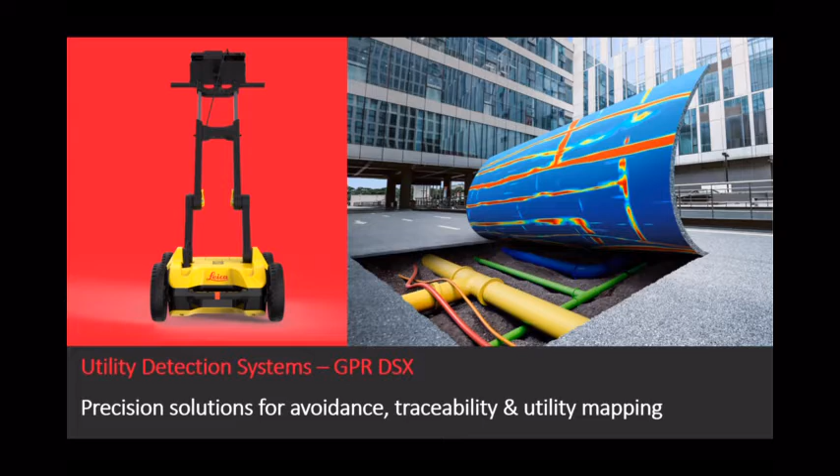So we're going to start off with the DSX, and this is a new take, should we say, on the visualization for ground penetrating radar. So it's still ground penetrating radar. We haven't broken any laws in physics. We've still got the same limitations that we've always had. And just remember that GPR isn't an all-seeing eye. It's just one of the tools in the toolbox that allows us to understand what is going on under the ground in that world we can't see.

So the reason for the tool even to be in existence is that anyone that's really used radar over the years is used to seeing a radargram, that gray mesh that's on the left-hand side of the screen. Now, this can be a challenge. If you're a utility professional, working with that is no issue. You can glean a lot of information from it. But this piece of technology is geared around damage prevention. We're not trying to sell this to a utility professional. We're just trying to mitigate as many utility strikes as we can. How do we make the technology simpler so people can understand what's happening under the ground?

So we looked at it and we see the radargram as a challenge. It's a barrier for people to feel comfortable and interact with and get the best information possible. So what we did with the DSX is we changed the workflow. We changed the approach of how we find utilities, and looked at it from a best practices point, where we should cover an area in a multitude of directions with a multitude of tools. And instead of the radargram, we gave a tomographical image, which is what we can see on the right. It almost looks like a thermal imaging view of the ground. And we're just looking for anything long and linear, and we're going to use algorithms to help determine where these cables and pipes are.

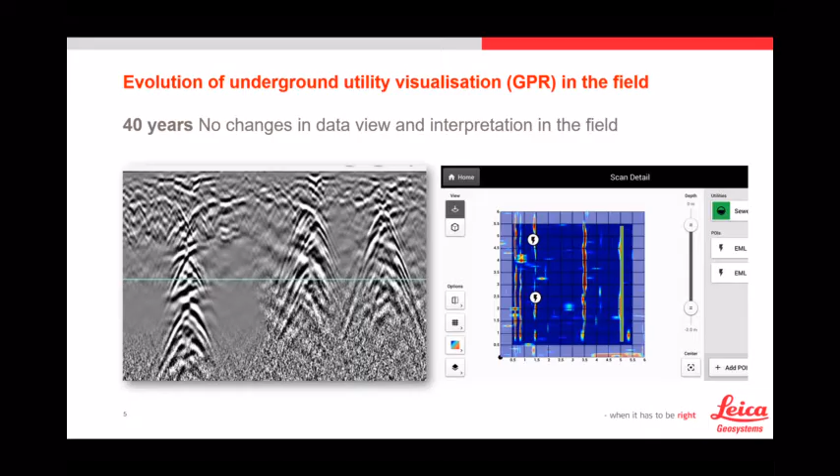So, as I said, it's ground penetrating radar. We haven't changed anything here. The antenna, to be technical, is a 600 megahertz antenna. You're going to get around 6.5 feet of penetration. About 2 meters is where it maxes out on its algorithms and processing this information. As you would expect, it does link with positioning sensors, total stations, or GNSS. It doesn't matter if it's a Leica or a competitive unit, we communicate with all. But really the thing that we did different is with the DXplore field software. And really the important part there is the word field.

We don't need to process any data back in an office. Everything we see is delivered within minutes within the field. So we acquire the information, we produce the visualization, it assists in the interpretation, and then we can document everything in the field. And when I say document, that can be a DXF, DWG, Esri shapefiles, PDF reports, everything's done directly in the field, and we can work on this information almost immediately.

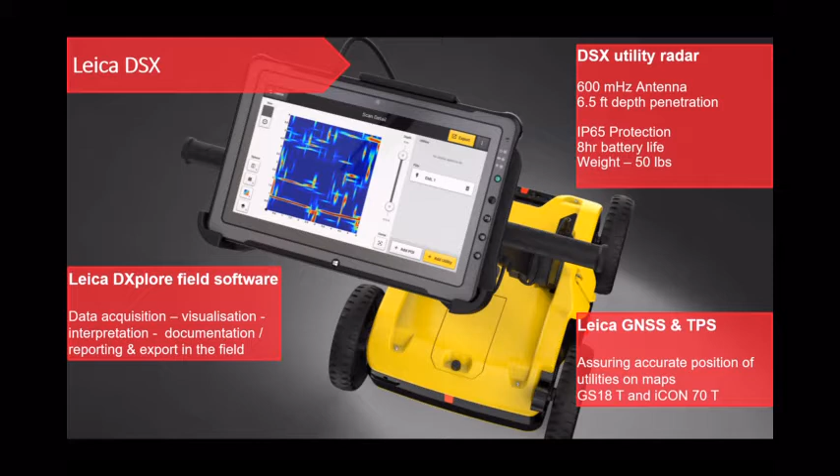So to get this, what did we do? So like all ground penetrating radar, we need to cover an area in 2 directions. We call it the grid scan. So we need to cover an area, and the biggest grid scan we can do at any one time with the limitations on the speed for the processing is 33 feet by 33 feet. Okay, so 10 meters by 10 meters. We collect over the area in 2 directions, and we're going to have a scanning interval of 18 inches or half a meter, and we're going to cover the area.

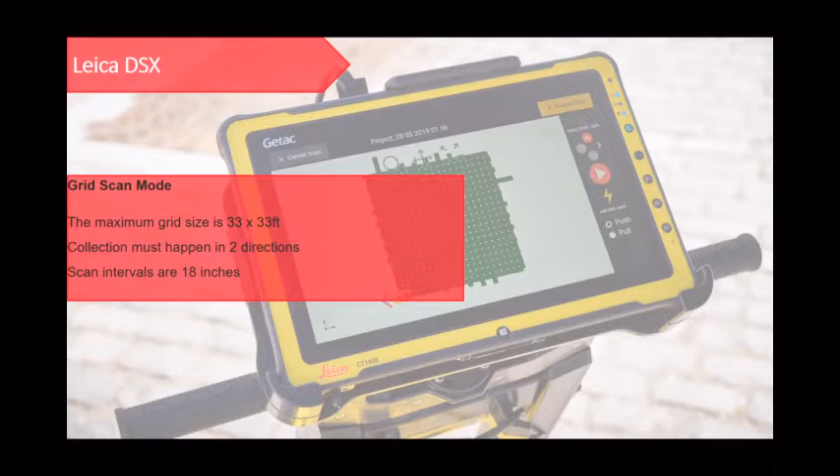So the only thing that we see at the start of any project is making sure we get the best data into the system as possible. The better the data we have in, the better the information and the data we get out. So we collect the data. We can then analyze that data. So we collect everything, we hit a button that says analyze, and within about 30 seconds, we get this processed model of information that looks like a thermal imaging view of the ground, should we say, the tomographical image.

We have a depth slider on the right-hand side, so we can go through in 5, 10 centimeter chunks and look for anything that's long and linear, typically what utilities are. So as we go through these different depth layers, we can start to see these linear objects, and this is where we can utilize the algorithms that are within the system. So when we can see something, we hit a button that says add utility, we slide our finger down what we believe to be a pipe, that anomaly, and the system is going to make the determinations for us.

So it utilizes algorithms to go and look at the radargrams, effectively, that bit we don't see. And can it see a hyperbola? Can it see these indications of utility? If it can, it agrees, marks it, and then utilizing a semi-automatic pipe tracking algorithm, it'll draw the utility line in for us within a matter of seconds. So as you can see, we have the first line marked.

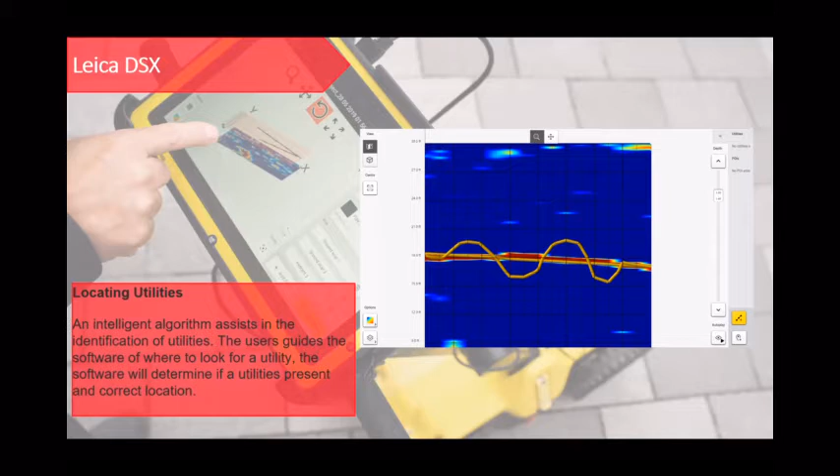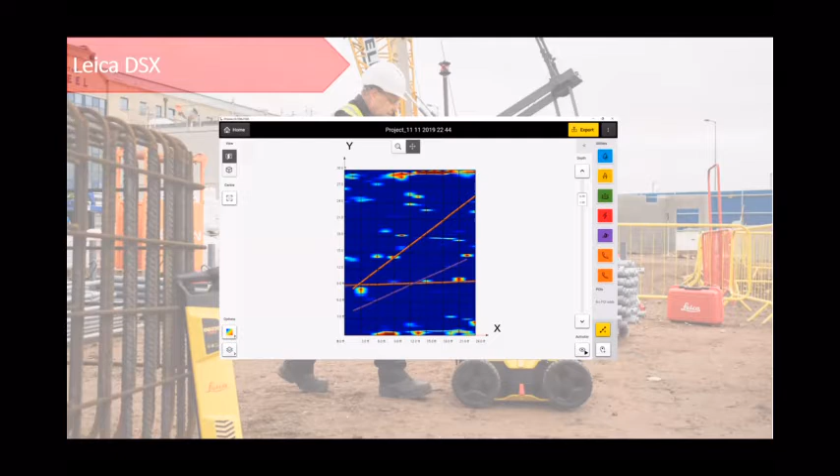Now, like I said, it can guide us. We don't have to be brilliantly accurate, and it puts it in the exact location it was detected. So for example, I drew the line as a wave, but the software has the ability to put it in the correct location for where those utilities are located. So as an example, we're going to work through this block of data. We're going to go all the way through it, identify the utilities that we can see in that area, and then we're all good.

So the next step would be to turn that data view off. We no longer need it. We've identified where the utilities are. The next step is to understand where these are. Do we need to mark the ground or whatever? So we can turn that layer off, and then we have the utility pipes. So we can understand where things are going, how they're running, so on and so forth. So if we were utilizing a positioning sensor, we hit lead to utility, and we're able to mark out all those utilities. We get the XY direction, and it tells us how far to walk, where to mark, and so on. So it's extremely easy.

If we hadn't used a positioning device, so we didn't have a total station with a GPS antenna connected, then we can use an arbitrary grid, just lay that on the floor, and we can just pull tapes to measure where those utilities are located in that work area. But not only can we see them in a 2D view, we know with radar that we can get depth estimation. It is an estimation. We don't know exactly how accurate it is, due to a number of factors, but we can get that additional information of how deep utilities are.

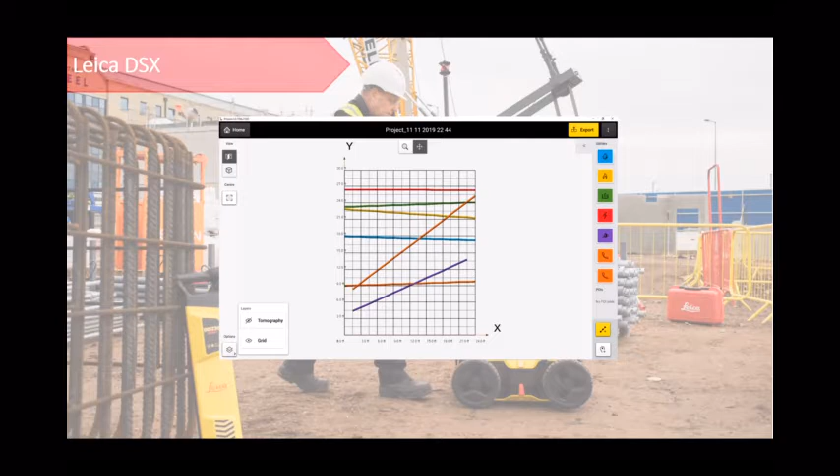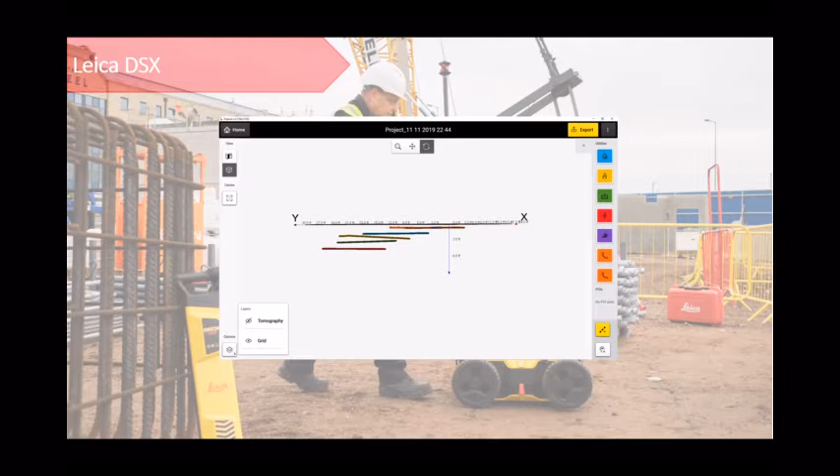So I can hit a button that allows me to rotate this as a model. So I can rotate that model of data and understand how deep those utilities are, how they interact with each other. That can change a dig plan, a dig process. But we have that little bit more of information, and it also looks more visual and easy to understand when we're directly in the field looking at the ground that we just scanned. Now, for documentation wise, during the collection or at any point, we can add other bits of information referred to as a point of interest. So like I said at the beginning, GPR is GPR.

It's not going to allow us to find everything, and you're probably going to use a locator before you use a GPR. So if you find something with a locator that you don't find with a GPR, we can put the marks in and say, yep, we found something here, and we can code it as an electromagnetic locator location point. Or we might have called a water line, and we know that because it's connected to a fire hydrant, or we can see a valve in the ground, or many other different things.

So we can start building some extra layers into this picture. But anything that we see here during our export does go out. So anything you put in here, size-wise, drawn-wise, will be exported during the DXF process, or as a PDF. Every piece of information is captured. So within a matter of minutes, and I do mean minutes, we're able to get a complete understanding of what's in that little area under the ground, where the utility is going, what are the dangers, how deep are they, so on and so forth.

But like I said, it's there for that prevention. Someone's going to be digging and they want to do a redundancy check on that area just to make sure that all utilities have been marked correctly, they are accurate. It's just that thing to give a little bit of self-confidence.

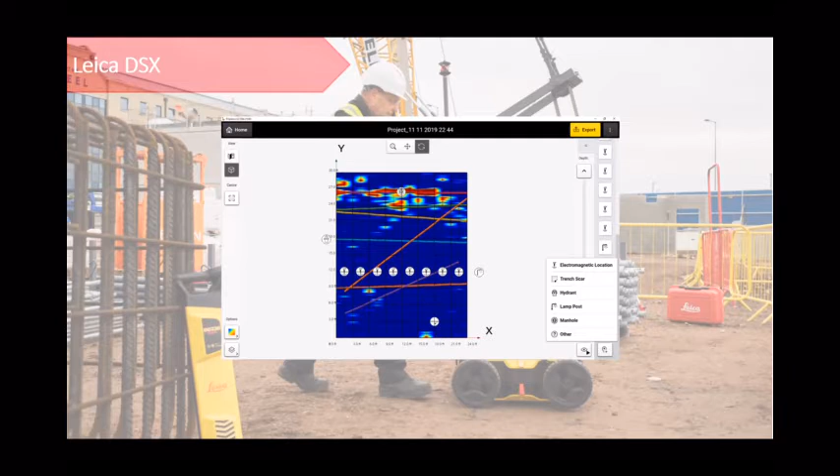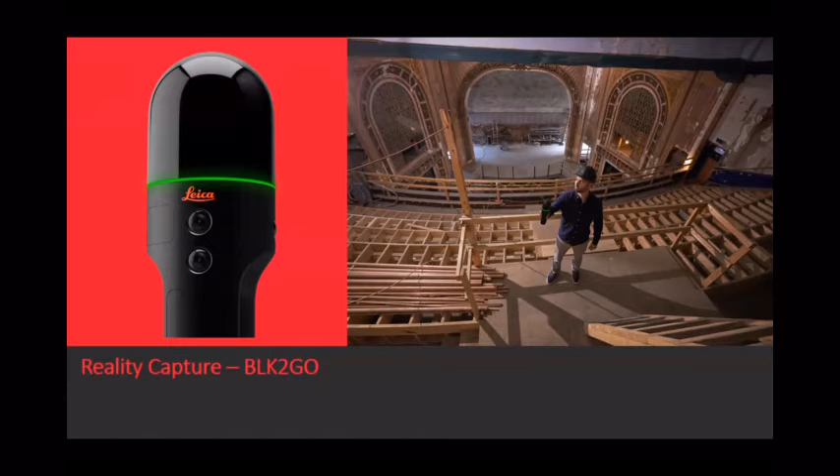So if we move on to a different technology, and again, it's not its normal home, should we say, we have a product called the BLK2GO. And as you can see from the image on the screen, it was pretty much invented for architects to capture information from inside buildings so they can design refits. But that's not its limitation. We can do other things with this technology.

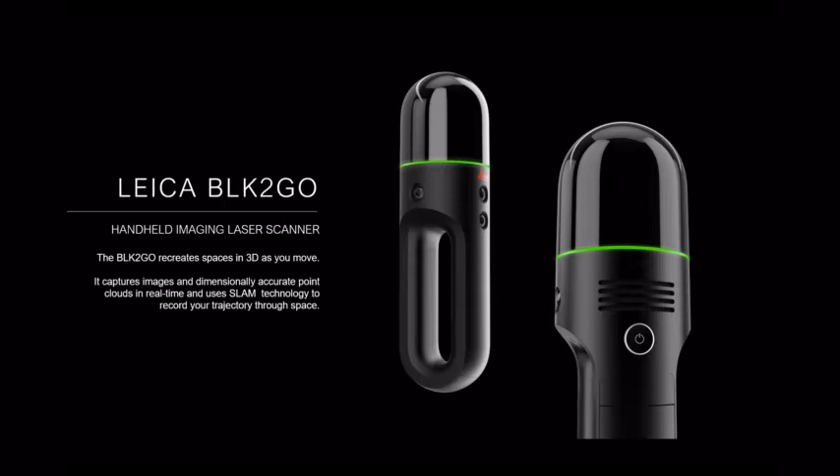So what is this tool? Well, the BLK2GO is a handheld imaging laser scanner, and it basically recreates spaces in 3D as we move. So it does everything instantaneously. We don't need to worry about it. We just walk with the system. It captures images that are dimensionally accurate, and it produces a point cloud in real time. It does it by using SLAM technology as we go through this space.

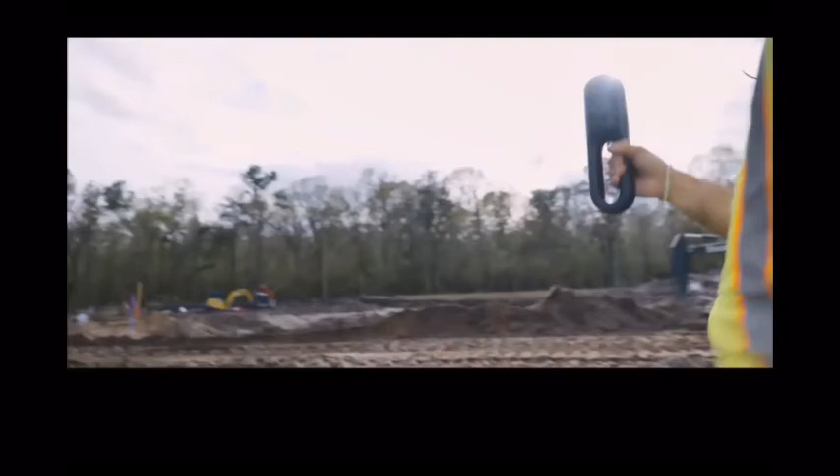So if we reference this to utilities, there's a video here, but effectively, we're putting utilities in the ground all the time, and we don't necessarily capture all the information about them. So I've got an example here of a subdivision being built, and before we bury all the pipes, we're going to walk around with the system. So here's a system in use. As we walk over the area, we're going to capture the information. We're utilizing the GrandSLAM technology, which is an IMU and visual inertial system as well.

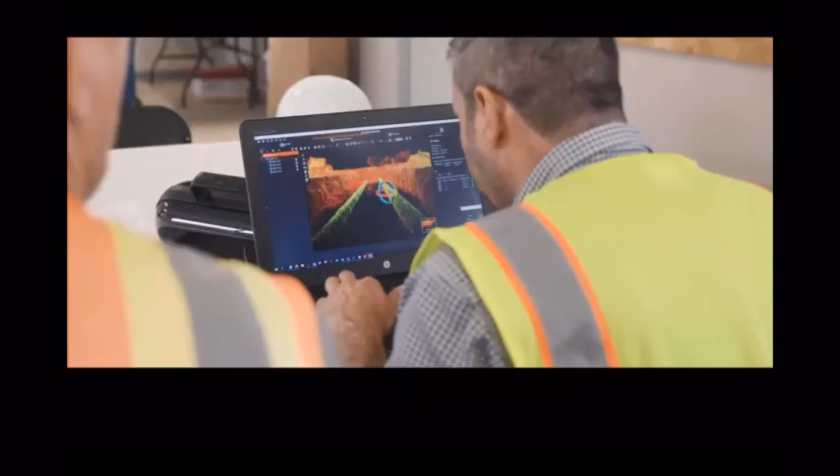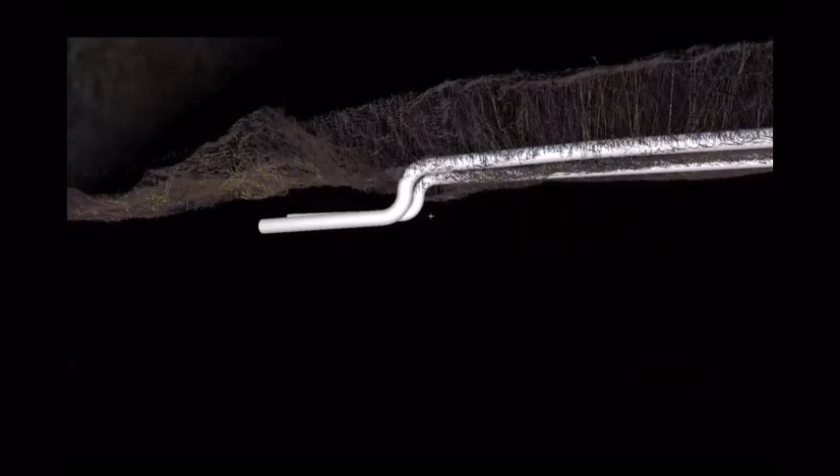And to view the data that we have, it's just a very simple process of plugging it into our laptop. And like I said, we've already created that point cloud. So we can get a full understanding of where those pipes are in the ground. And we can also model those pipes for documenting reasons. So we can walk around the site, capture this information, and understand where these utilities are. We've got the accurate information. Everything can be measured.

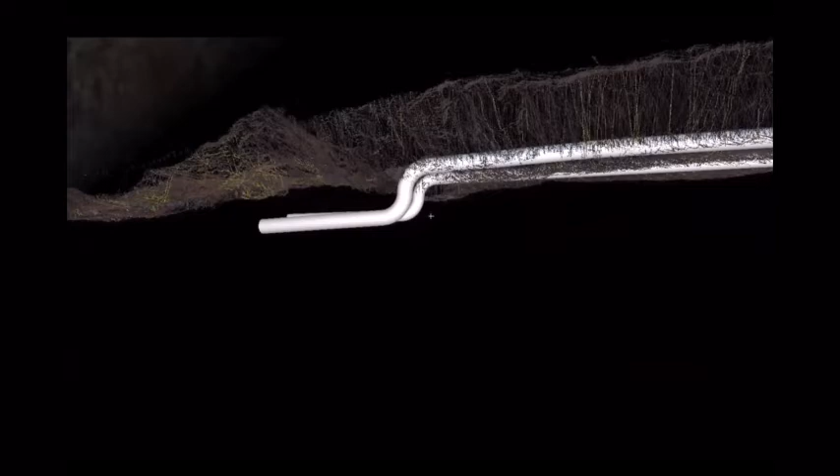It's a measurable and accurate point cloud of where the utilities are, sizes, diameters. Was a tracer line installed? We can see all this information by utilizing this technology. Very quick, very easy to use. We can just walk around and collect all this data and know with confidence that we have it.

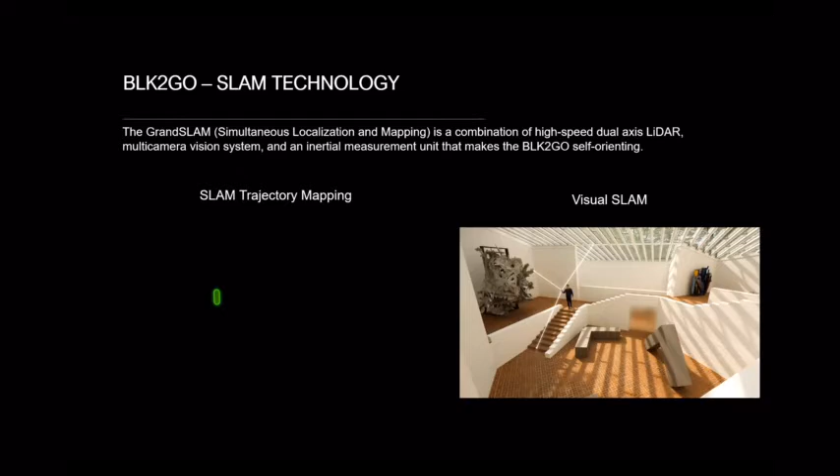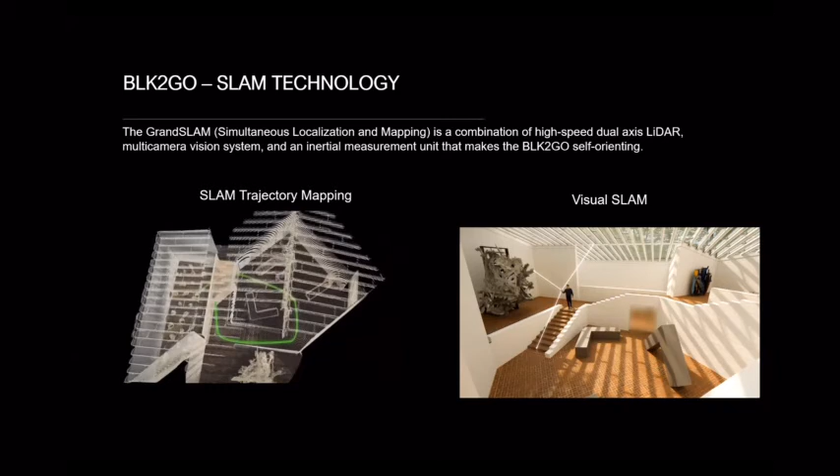So if you're not 100% sure how this SLAM technology works, what is it? What does it do? Let's just look here. We utilize something called GrandSLAM in this technology. SLAM technology is simultaneous localization and mapping, but we also combine it with high-speed dual-axis LiDAR and a camera system and an inertial measurement unit. So it always knows where we're going, and because of all those bits of technology within it, it makes it self-orientating. It knows when we walk upstairs, it knows when we turn left, we turn right. It knows exactly where we've been, how we've walked, every single piece of information that we could possibly want.

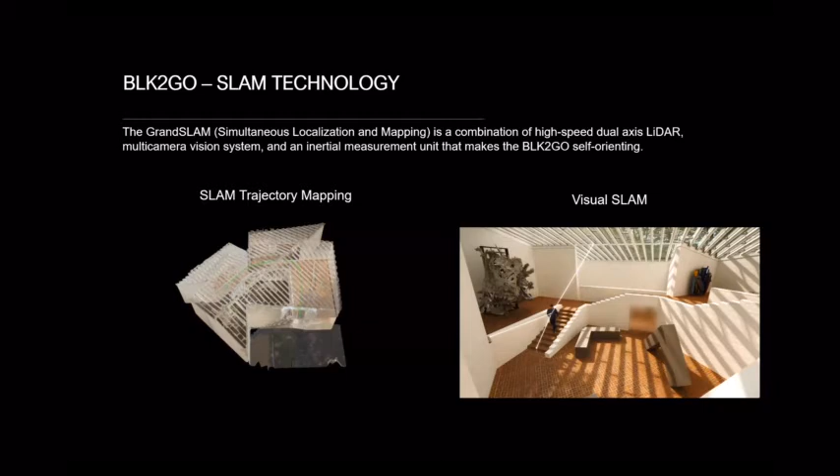Because we're walking with it, and because of this GrandSLAM technology, it makes it extremely fast to capture this data wherever we're going. And we're not just limited by walking around. Because it can capture the trajectory that we were taking, we can also capture under things. So we're not just limited to where we walk holding it. We can take the system however we want, point it in the air, take it down under things, take it into holes. We can do whatever we want.

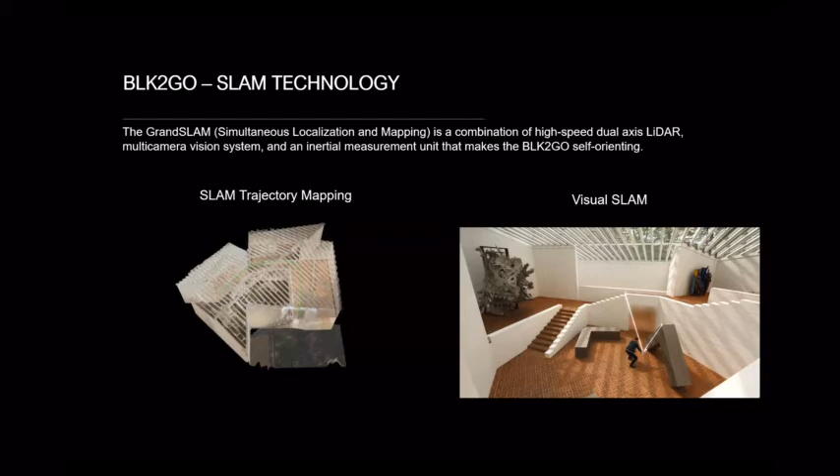It really is unbound because of the lightness of that system. No need for tripods, no need to set up. We just turn it on and we walk with the system. Nice, simple, easy, and very fast to capture this data that we want. Okay, so like I said, just to recap, the BLK automatically builds the 3D point cloud while in motion.

Okay, so we don't need to do any processing, it's all automatically done for us. So from the moment we begin the scan session to the moment we turn it off, all that imagery and 3D data are combined together. So it's immediate picture and understanding of what's going on. So that's one of the solutions that we can have if we've got open trenches and capturing the information before it goes in.

But then we also have another need for capturing information for the utilities. And as we can see here, we have a GPS antenna with a little hole cut on the side of it. So this is our imaging antenna. So the GS18I, as we call it, is the next level on from the GS18T. So as you would expect, we've done something else to it.

We've innovated it. We've tried to push the boundaries further in getting GPS measurements in difficult areas by utilizing visual positioning technology. So effectively, it's got a camera inside it, and that camera is running like any drone system does on photogrammetry. So that's built into the side of this GPS antenna. So any picture that we take, we can take a measurement within it, and we can get a survey grade point from that antenna.

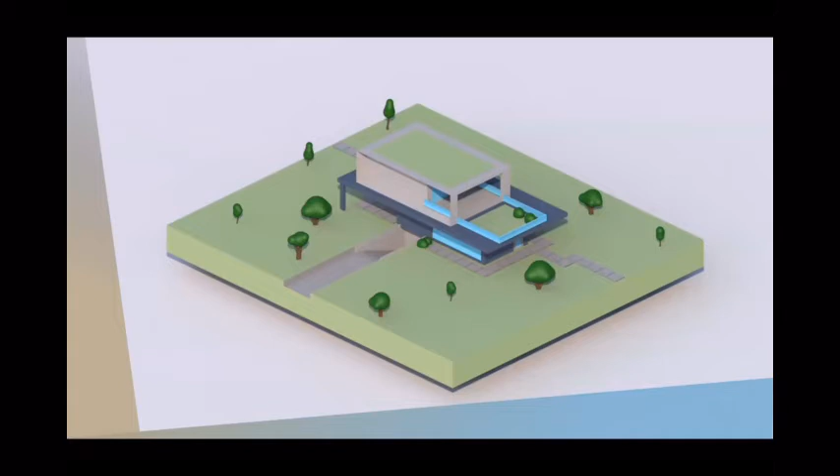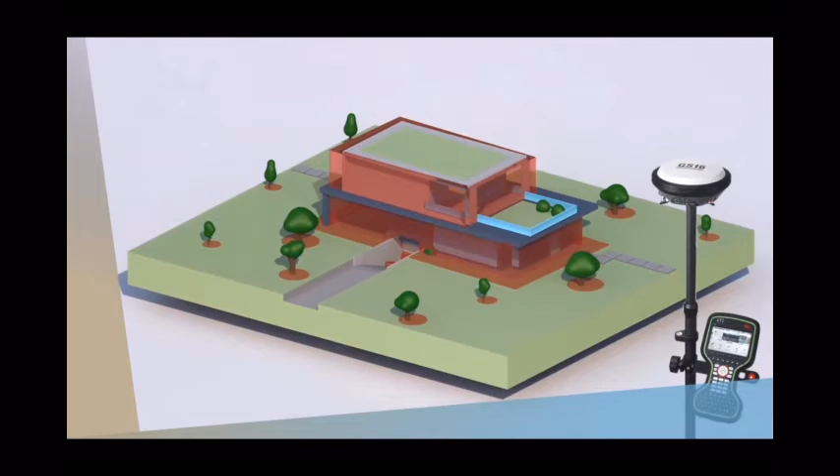So how does this help us, how has this changed things, and what does that mean if you're not 100% familiar with GPS? So we've got an image here of a building, and we've got trees surrounding it. And if we were utilizing a normal GPS antenna, we're going to have some issues getting underneath the trees or too close to the building, because that antenna needs to have a path to the air. It needs to be able to get to the signal to be able to take that shot.

When we released the GS18T, we managed to push those boundaries further. Because this can tilt, we can tilt the base of the pole into those difficult to reach areas, but we can't get all the way in, but we can get closer. But by having the imaging technology within the GS18, nothing is now a limitation. You can see the whole building is green. We can take a shot from the ground, up in the air, under trees, under canopies, anywhere that's necessary.

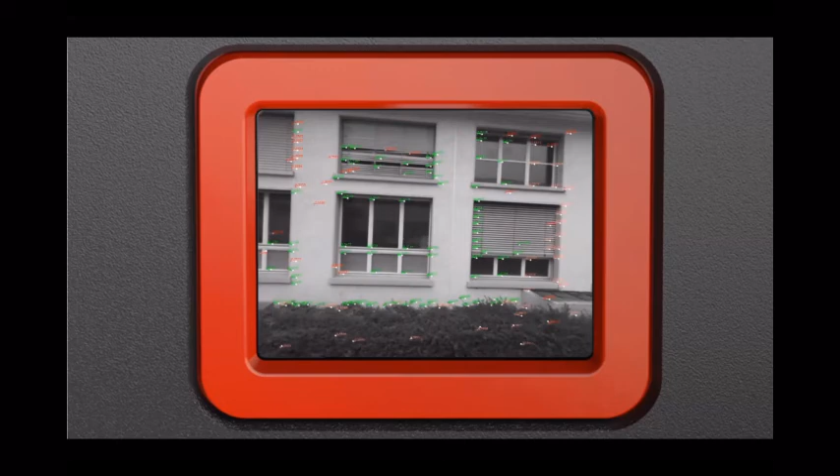So what does this actually look like? As we utilize the system, all those green points are every single measurement that we can take in real time. We can see all these different points. And as you can imagine, to try and take those shots as a surveyor in the field is going to be difficult, hard to get to, and time consuming. But really, it's just a click of a pen on the screen, and we can take any measurement at any point that we want.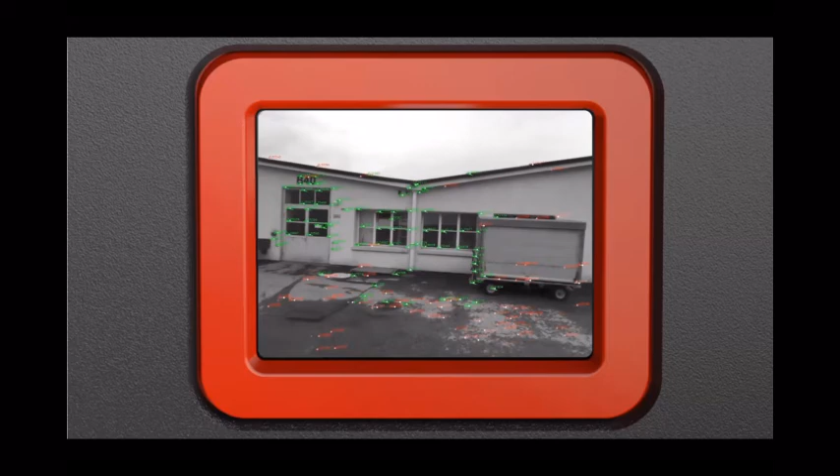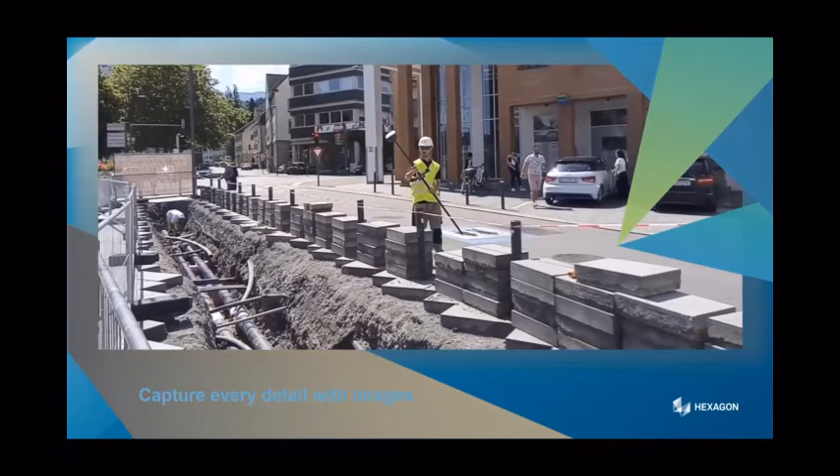So how am I going to get this into the world of utilities? Well, like I did with the BLK2GO, we know we have open trenches. I know where I start and I know where I'm going to finish. I can just literally point the antenna head into a hole and capture all the details of what's in that hole. Whatever the utility is, I can get full information of what's down there, understand where these utilities are, take measurements to them, because the IMU and the camera built into that antenna keep me accurately positioned. So that's one great feature of it.

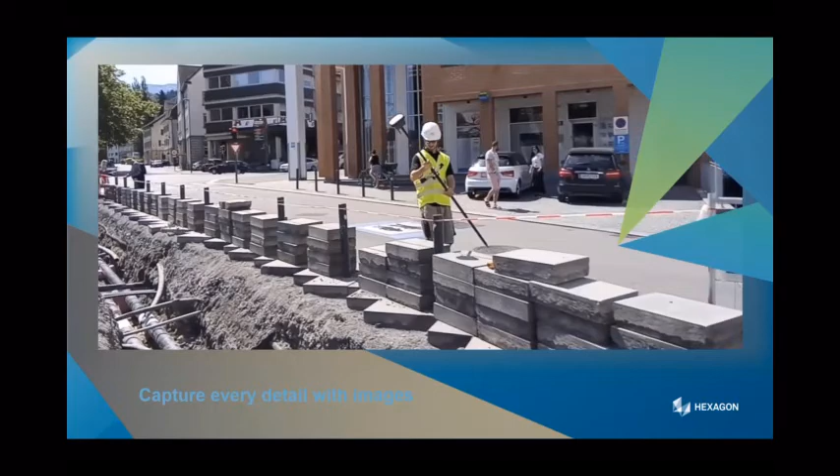Another great feature is that we have an image of whatever we take. We can effectively do the QA/QC in the field. So let's say we have a utility professional going out and marking the utilities, as we can see here. And the surveyor goes out and he's trying to survey these marks after him. He might look at this area and think, not 100% certain what this means. Is this a T? Is it a bend? Are there two lines together? But with my expertise, I think it's this.

But we have a picture. We have an understanding of what was laid on the ground, and we can make that change in the office effectively immediately. We don't need to send someone back out to relocate it or to resurvey it, because we have a picture of what was initially laid the first time, and we can make those adjustments to that document.

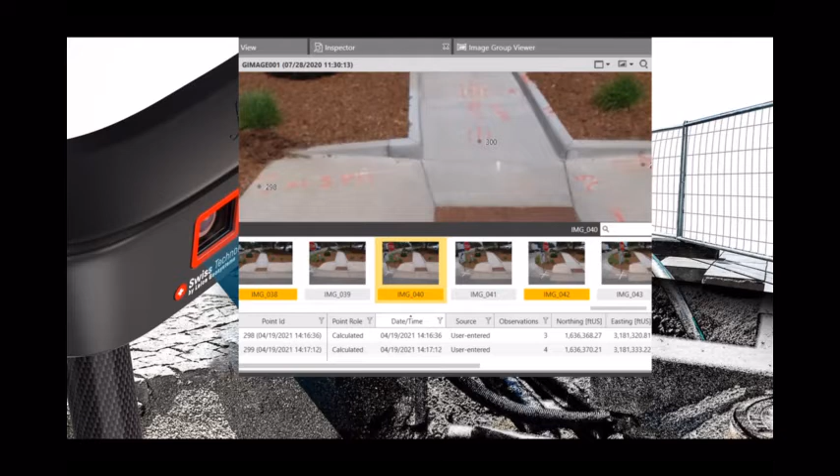And we can also know that those positions or those measurements that we take are accurate as well. They are to survey grade accuracy, which is quite powerful. But we can take it a step further as well. You know, we've all seen surveyors trying to take shots onto certain things in the right of way. If we have manhole covers, we have valves that need to be captured. Typically, a surveyor has to go into the roadway to take those shots. He has to be in danger.

So now, again, we have an image of the area. We can take those shots, those measurements, those points from relative safety. We can be on the sidewalk, walking down, saying, yeah, we need to capture this area. We've got a picture, a number of little images. Let's take those shots from a safe distance and carry on.

And again, it works if someone's been into that right of way. They have done their utility locate. They've laid the paint on the ground. We don't need to put a second person in harm's way. We can reduce the amount of time we have people in danger. If we've got an image of it that we can take accurate measurements from, we can produce utility maps and survey maps significantly faster by keeping everyone, you know, as much as we can away from danger.

But again, the important part is not only taking that measurement from the image, but we have it there for QA/QC. We can understand what determination was made, what the site looked like at that time. We just have more information about what went on.

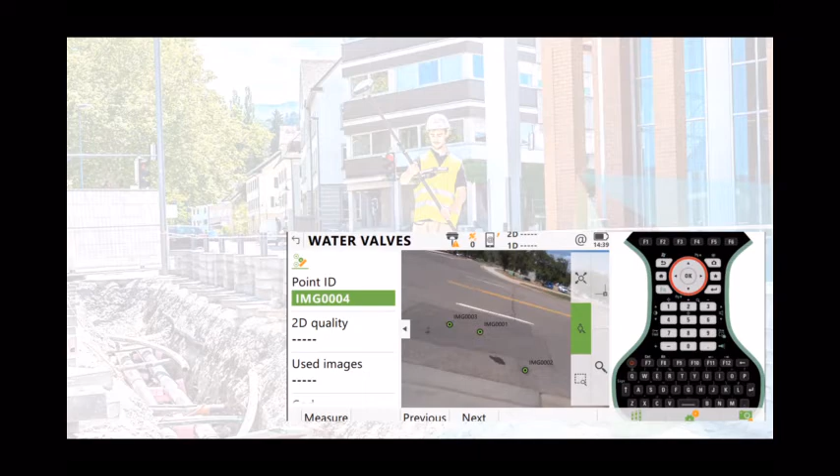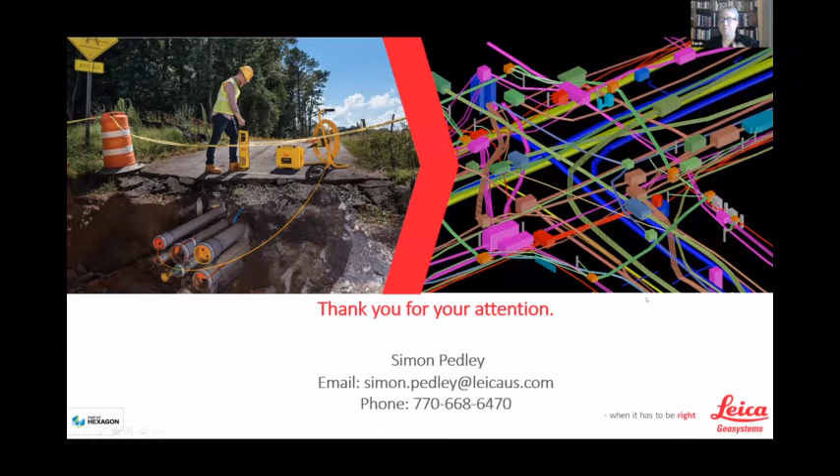yeah, some people want to drill into some tech details. I guess people are getting their GeoGeek on, me included, and I have a few questions. So I'll give you a heads up. I have a Stream C. Yep. And yeah, there were few changes in GPR for so long, as you pointed out, and then the array type did change things quite a bit, made that tomographic sort of representation possible. But the past 4 years has been just constant software development. And it's great to see a lot of that maturing.

Yeah, there's still a little bit of tea leaf reading, you know, but that's dependent on lots of things, the conditions and soil types. And we can't change physics.

Okay, so question about the BLK2GO, the SLAM. Somebody's asking about getting that to register to a project or jurisdiction datum, because it's collecting that point cloud relative to itself through the visual SLAM type GrandSLAM. But do you drop targets on the ground so you can register it to the datum? Yes, that's what you would do if you needed to register it to the datum. You don't have to; like I said at the beginning, it was really for architects to capture the current real life inside. But yeah, you can reference it like you would any normal scanner. It is a scanner at the end of the day.